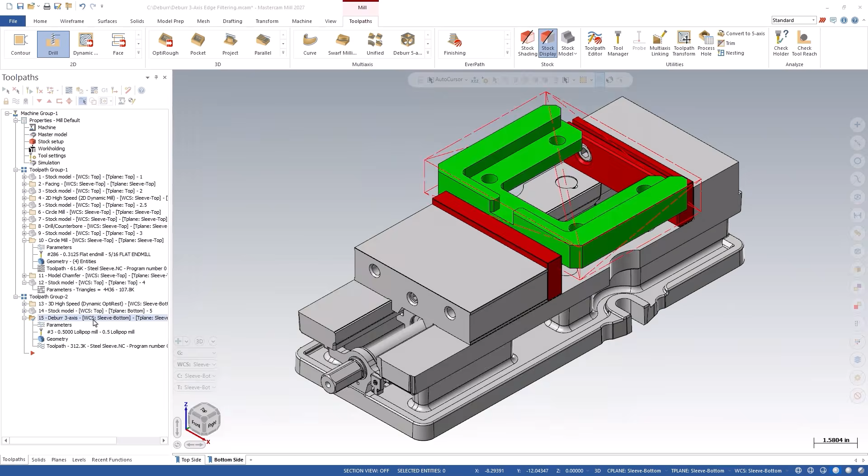First, we have edge filtering. And this really helps when users set their edge definition to auto detect. If you recall, auto detect will detect all of the edges on your part based on the part's surfaces. And as we see here, this Deburr 3-axis toolpath gets everything, including the vertical edges and these 4 holes.

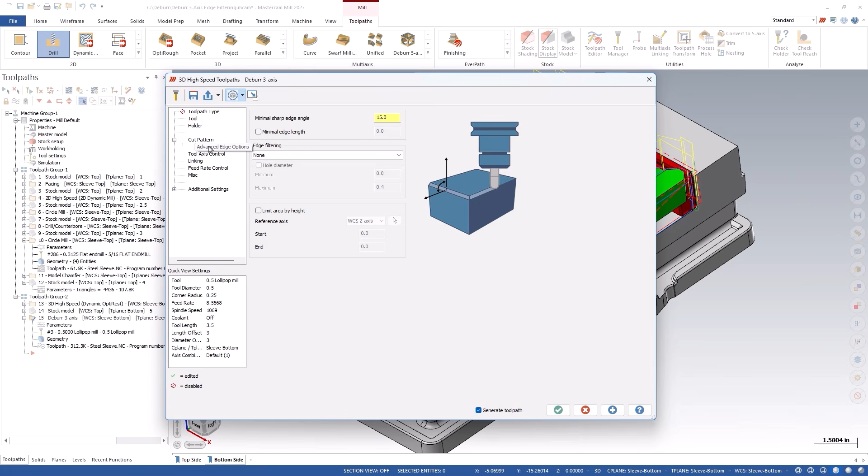Well, that might not be desirable. And to address this, we have the option to exclude edges, where we could manually select the edges we wish to skip. But let's check out the new filtering options. Let's go into edge filtering, and I'll set it to exclude both vertical edges and circular hole edges. And note the other options we have here, including the ability to filter by hole diameter.

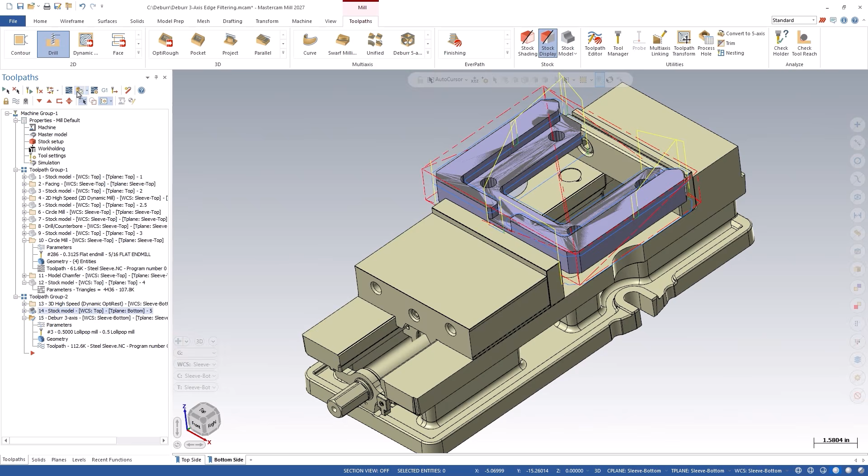And after we regenerate the toolpath, in the Mastercam simulator, we see that we have nice, cleaned up motion without the unnecessary holes or vertical edges getting deburred. Alright, so that's a bit about our new edge filtering enhancements. Next, we have some improvements to cut direction, so let's take a look at these enhancements with a different part.

We've previously had both climb and conventional options for cut direction, but new in Mastercam 2027 are the automatic and follow curve chaining options. Automatic is especially useful in cases where we're using lollipop tools to deburr undercuts, like this.

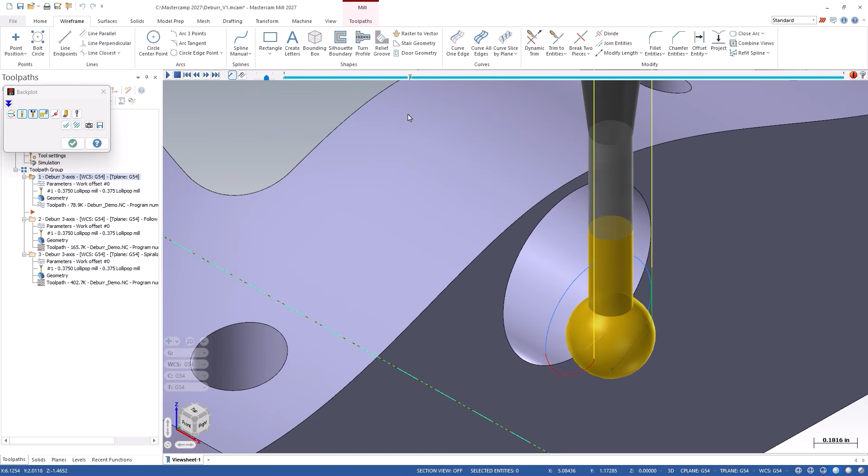In previous releases, where the automatic setting was not an option, the toolpath would be broken into multiple segments to ensure that we're respecting the climb or conventional cutting strategy that the user had chosen. With the new option, automatic, we're now prioritizing continuous toolpath motion, and will even ignore the user's chain direction, resulting in one continuous pass.

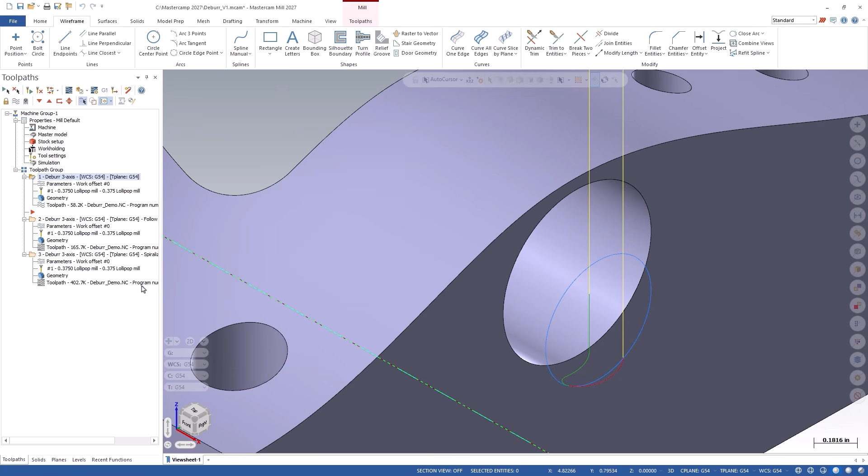Follow curve chaining, on the other hand, gives the user complete control over the direction of the cut, and the toolpath will follow exactly the direction that the user had defined when chaining the geometry. In this example here, we see that everything is chained counterclockwise. But since the direction is set to automatic, the direction of the chain is not necessarily respected.

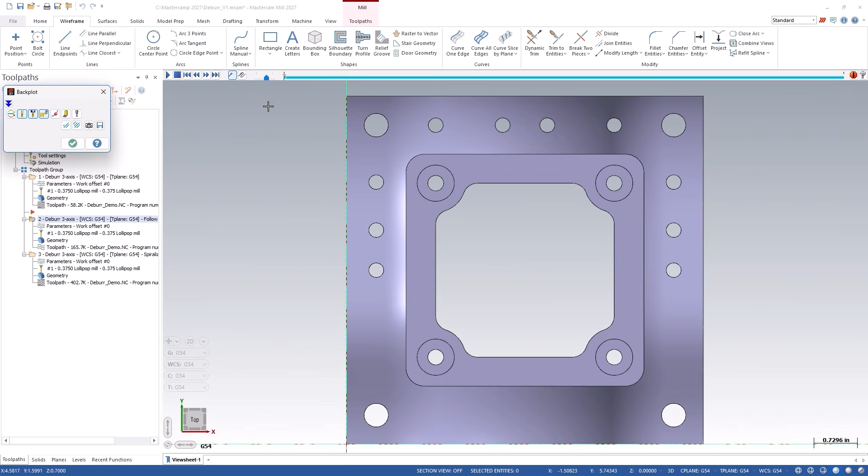If, instead, we set it to follow curve chaining, we now see the toolpath moving in a counterclockwise direction for all of the chains following the curve chaining. This results in the user getting more control over the direction of their cuts.

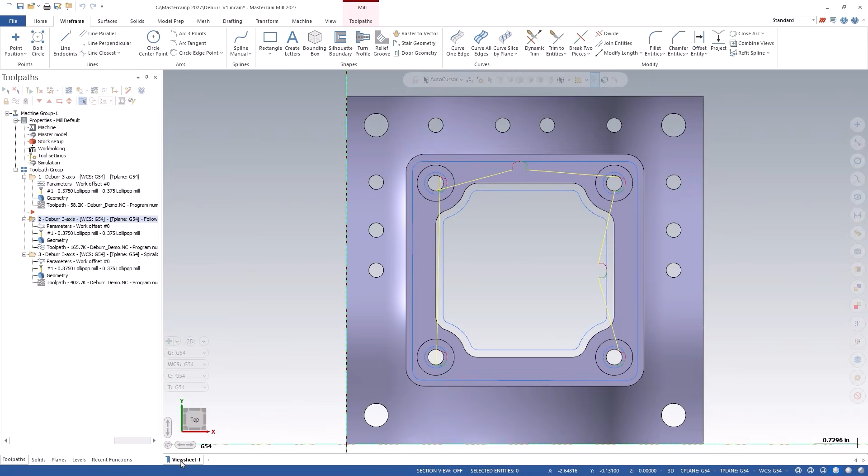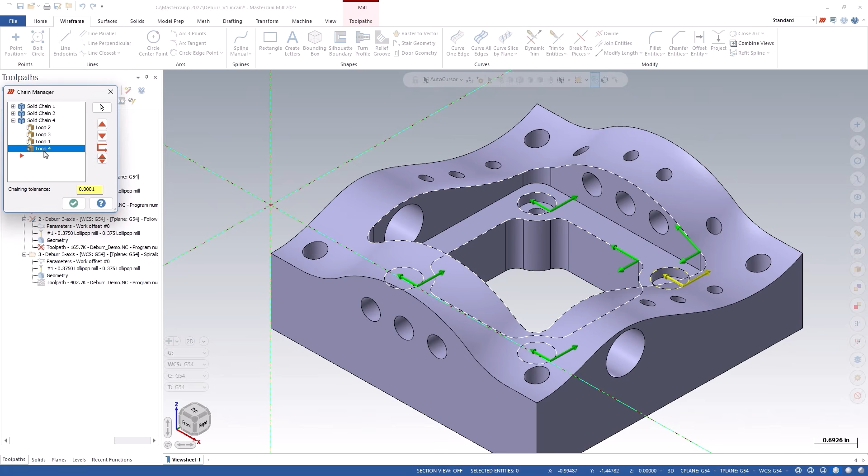Similar to the various direction improvements we just discussed, we also have the option to preserve order. This feature provides users a way to select the edges they want to deburr in the order they want to machine them. Previously, users could not manually control the sort order of the various edges that were getting deburred, mainly because Mastercam could resort the chains for optimized efficiency. Preserve order will respect the order in which you selected the chains.

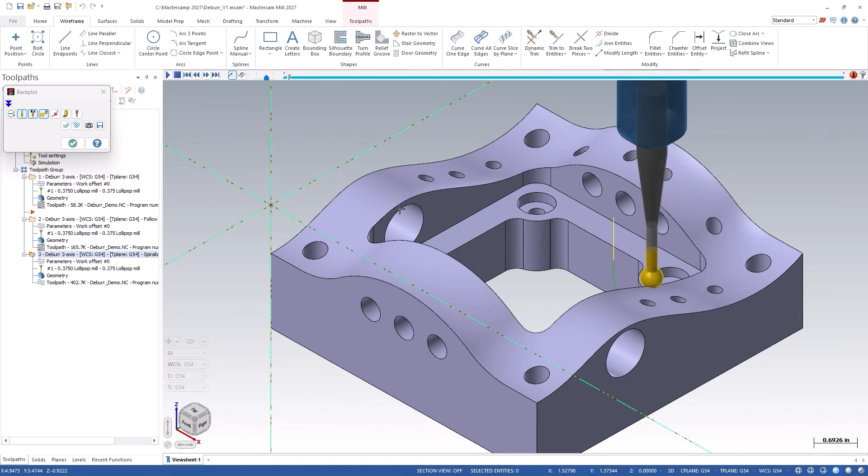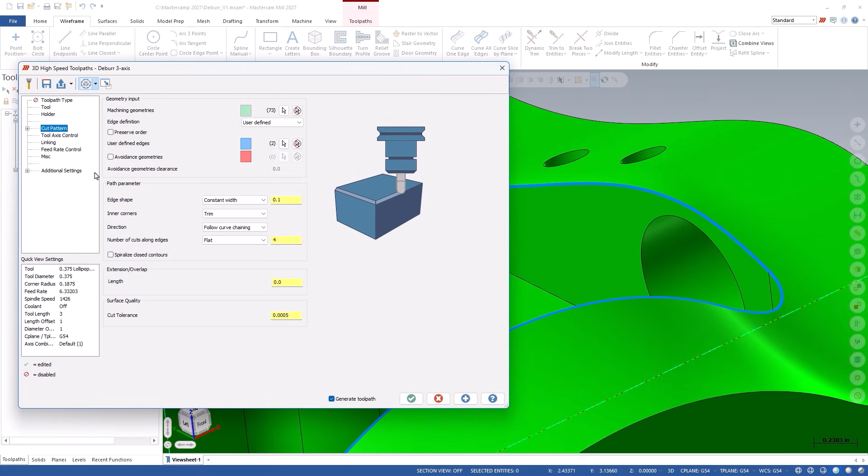And while we're reviewing these toolpaths, let's take a look at the new Spiralized Closed Contours option. This is useful in a scenario where you set number of cuts along edges to be greater than 1. Before we had this new functionality, the tool would make multiple passes along the edge as expected, but it often included multiple linking moves and directional changes. With Spiralized Closed Contours enabled, the offset passes can now be converted to a spiral, reducing linking motion and directional changes from pass to pass.

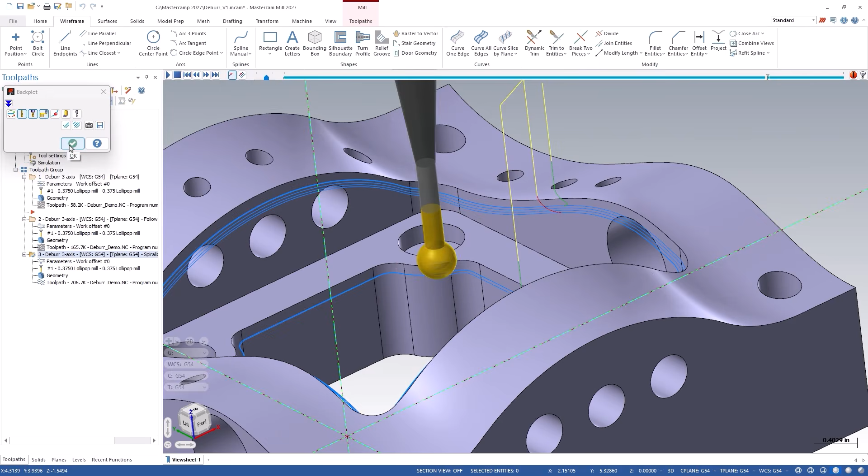And finally, new in Mastercam 2027 is the support for a backside chamfer tool. By defining a slot mill tool within Mastercam and utilizing a chamfer shape for the upper and lower corner treatment, these tool types can utilize both the top and bottom side of the tool. In the past, only the bottom of these tools were utilized, but now both the top and bottom are considered for deburring operations, significantly reducing multiple setups and programming time.

Alright, well, the Deburr toolpaths have been a great addition since they were added, and this year we've continued to improve on this technology with some great enhancements. If you haven't used the Deburr toolpaths in your shop, I encourage you to check them out.